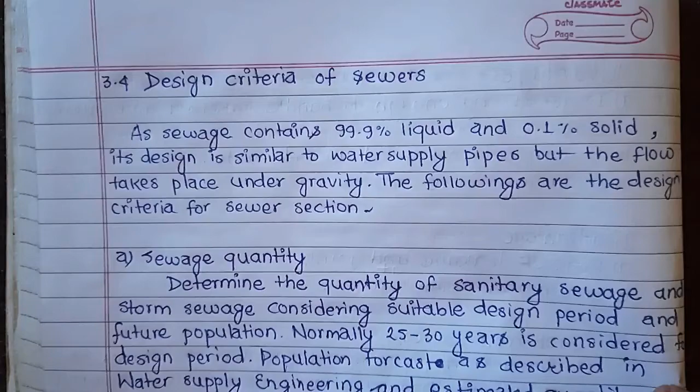Design criteria of sewers.

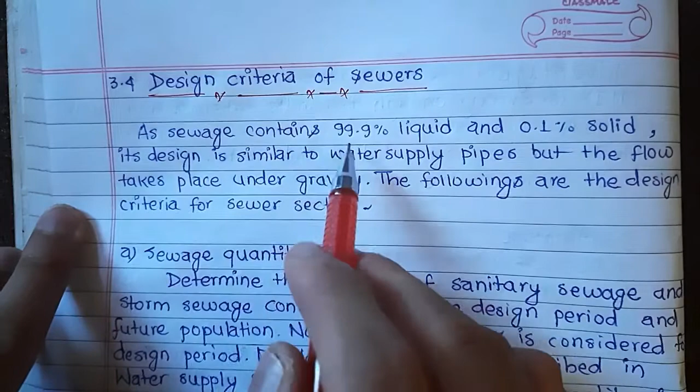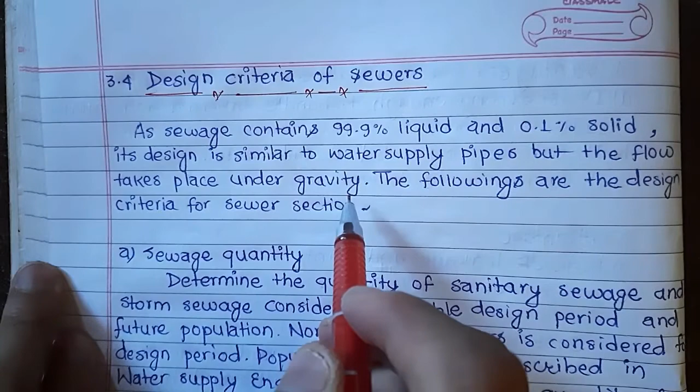As sewage contains 99.9% liquid and 0.1% solid, its design is similar to water supply pipes, but the flow takes place under gravity. The following are the design criteria for sewer section.

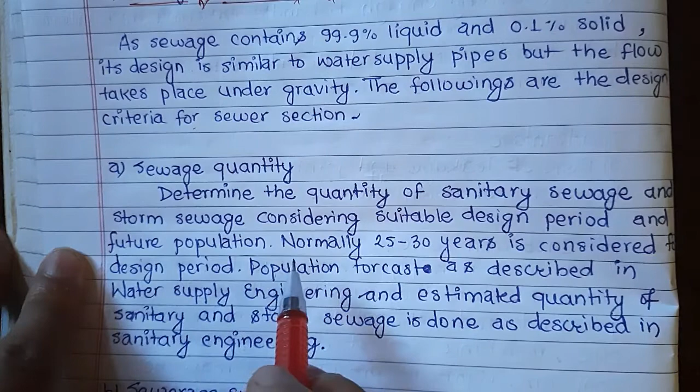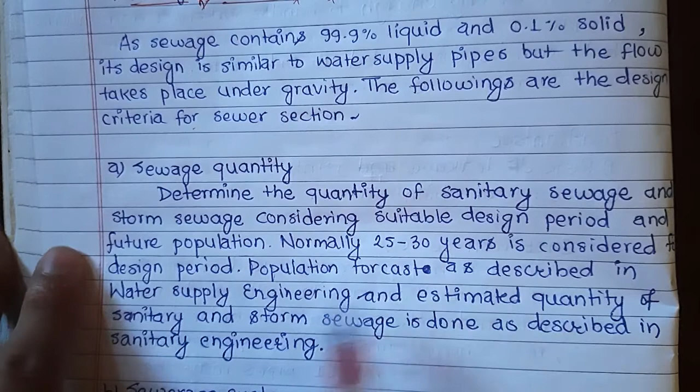A: Sewage quantity. Determine the quantity of sanitary sewage and storm sewage considering suitable design period and future population. Normally, 25 to 30 years is considered for design period. Population forecast is done as described in water supply engineering, and estimated quantity of sanitary and storm sewage is done as described in sanitary engineering.

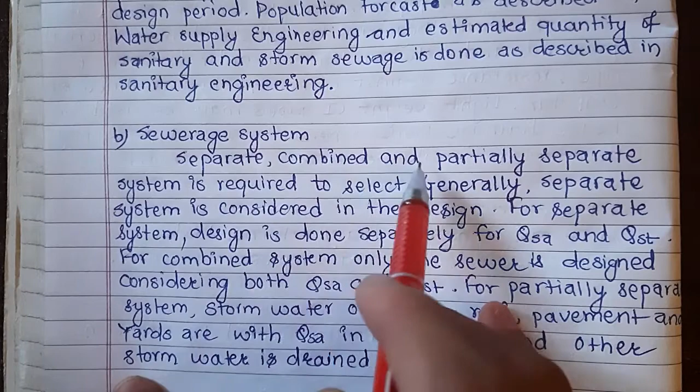B: Sewerage system. Separate, combined and partially separate system is required to select. Generally, separate system is considered in the design. For separate system, design is done separately for QSA and QST.

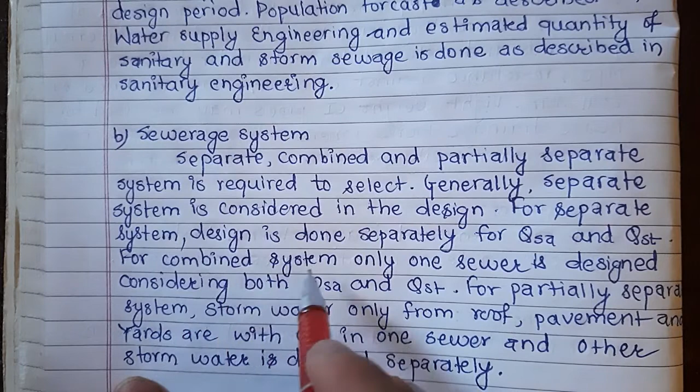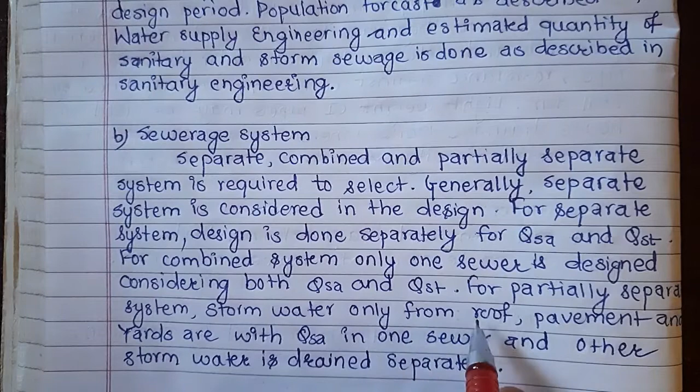For combined system, only one sewer is designed, considering both QSA and QST. For partially separate system, storm water only from roof, pavement and yards are combined with QSA in one sewer, and other storm water is drained separately.

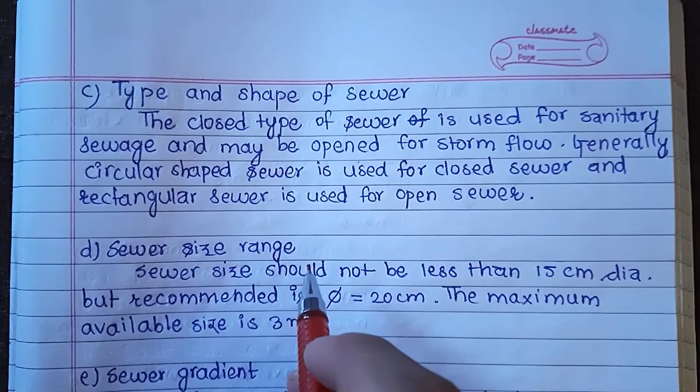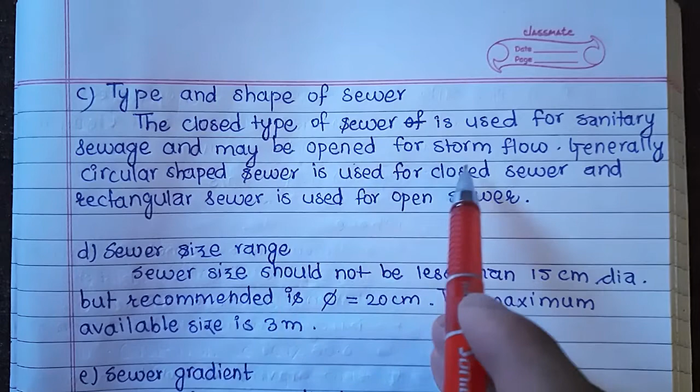C: Type and shape of sewer. The closed type of sewer is used for sanitary sewage and may be opened for storm flow. Generally, circular shaped sewer is used for closed sewer and rectangular sewer is used for open sewer.

D: Sewer size range. Sewer size should not be less than 15 cm in diameter, but recommended size is 20 cm. The maximum available size is 3 meters.

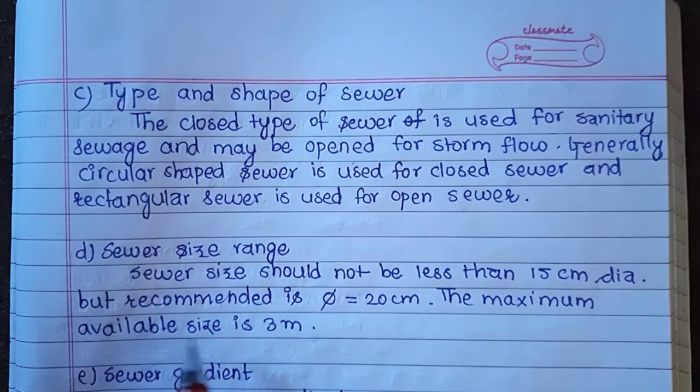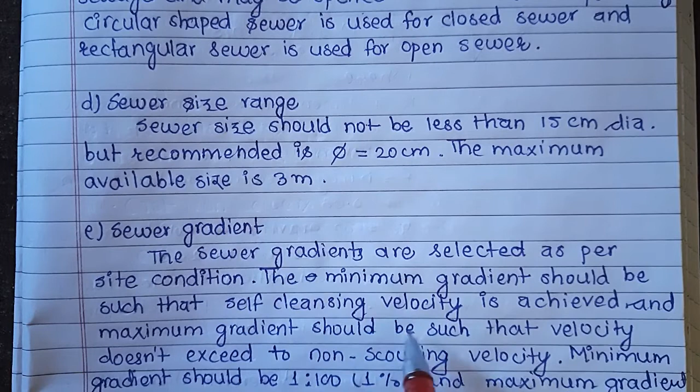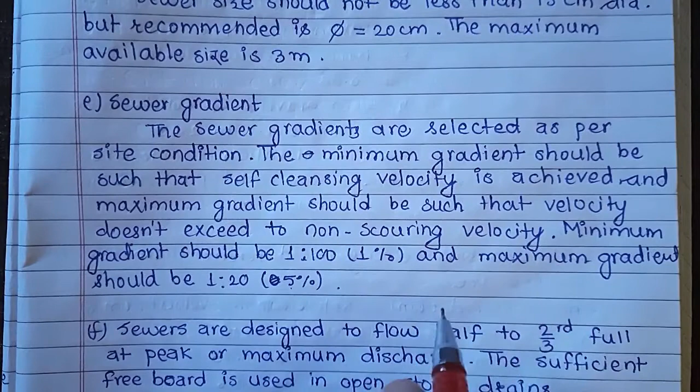E: Sewer gradient. The sewer gradients are selected as per site condition. The minimum gradient should be such that self-cleansing velocity is achieved, and the maximum gradient should be such that velocity doesn't exceed the non-scouring velocity. Minimum gradient should be 1% and maximum gradient should be 5%, that is 1:20.

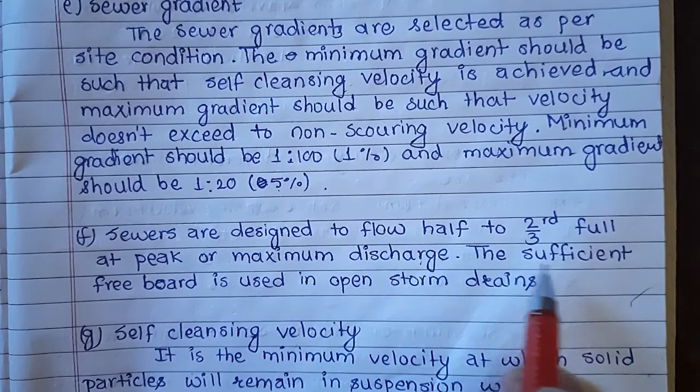F: Sewers are designed to flow half to two-third full at peak or maximum discharge. Sufficient freeboard is used in open storm drains.

G: Self-cleansing velocity. It is the minimum velocity at which solid particles will remain in suspension without settling at the bottom of sewer. The design velocity of flow should not be less than self-cleansing velocity at peak flow.

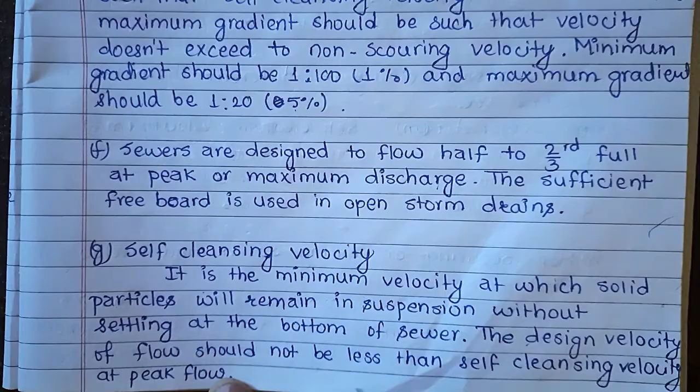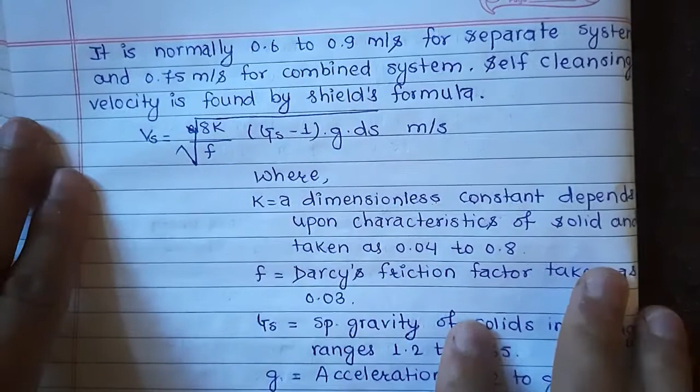It is normally 0.6 to 0.9 meter per second for separate system and 0.75 meter per second for combined system. Self-cleansing velocity is found by Shield's formula.

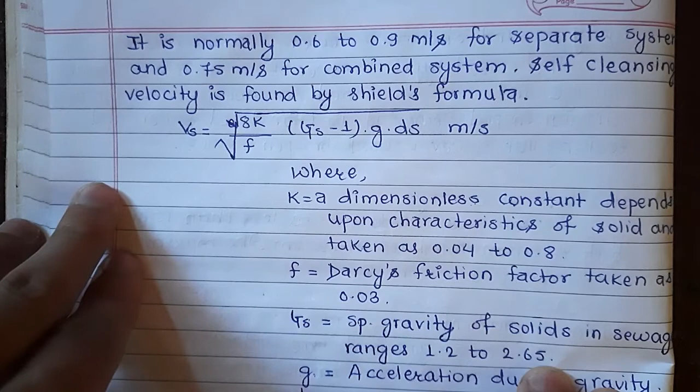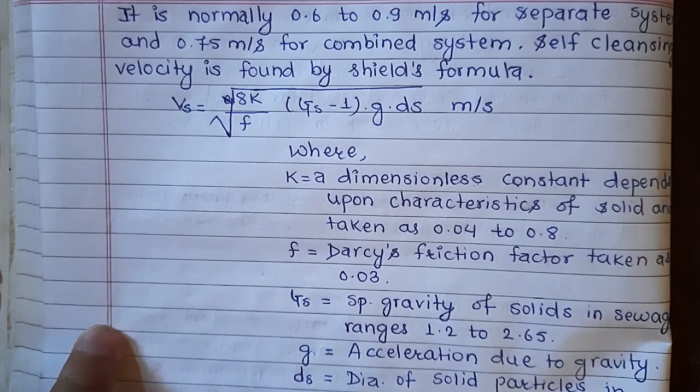Vs equals root over 8k divided by f, times (gs minus 1), times g, times ds, in meter per second. Where k equals a dimensionless constant depending upon characteristics of solid, taken as 0.04 to 0.8. F equals Darcy's friction factor, taken as 0.03. Gs equals specific gravity of solids in sewage, ranging 1.2 to 2.65. G equals acceleration due to gravity. ds equals diameter of solid particles in sewage, in meters.

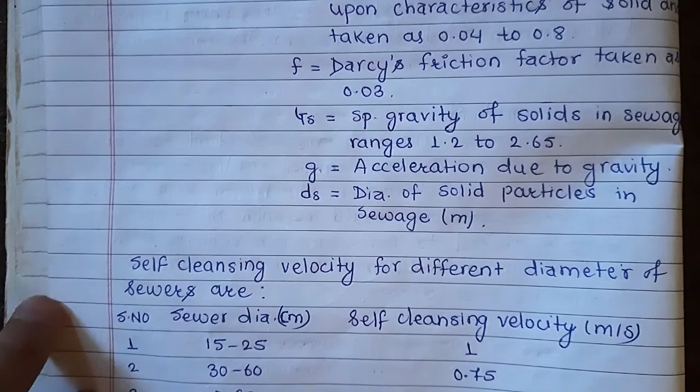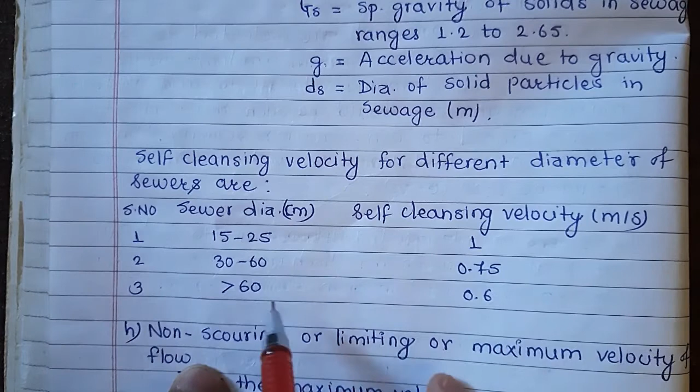Self-cleansing velocity for different diameters of sewers: for diameter ranging from 15 to 25 centimeters, self-cleansing velocity is 1 meter per second. Similarly, for 30 to 60 centimeters, self-cleansing velocity is 0.75, and for greater than 60 centimeters, self-cleansing velocity is 0.6 meter per second.

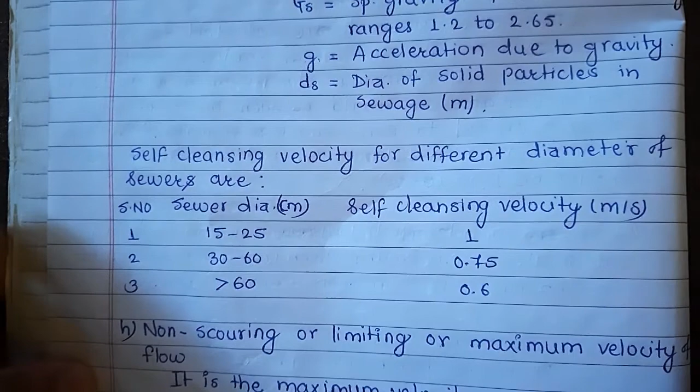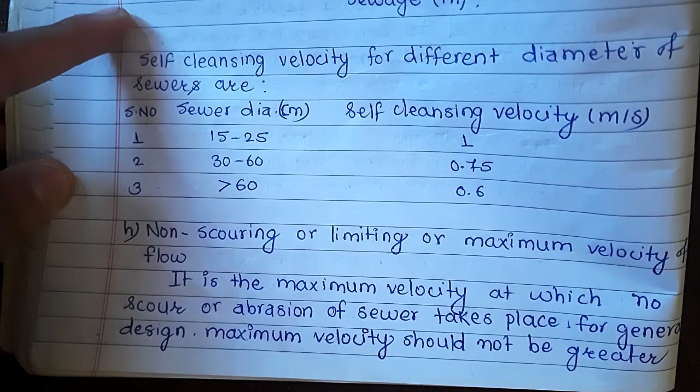H: Non-scouring or limiting or maximum velocity of flow. It is the maximum velocity at which no scour or abrasion of sewer takes place. For general design, maximum velocity should not be greater than 3 meter per second.